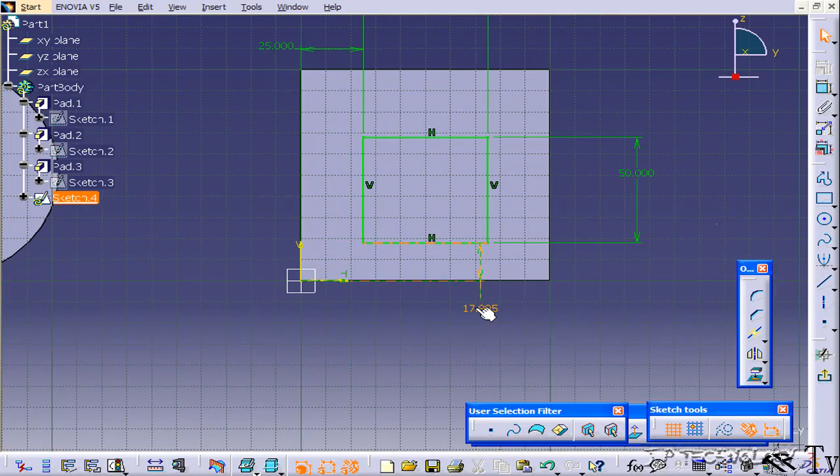So to start off, let's do one on this face here. Let's click this face, click Sketch, and let's sketch a square on the face here. And let's dimension it to 50 by 50. And then let's dimension it from the origin here. So let's make it 25 by 25. Now we've got our sketch right in the center of the solid body. So let's exit this workbench and let's apply the drafted fillet pad.

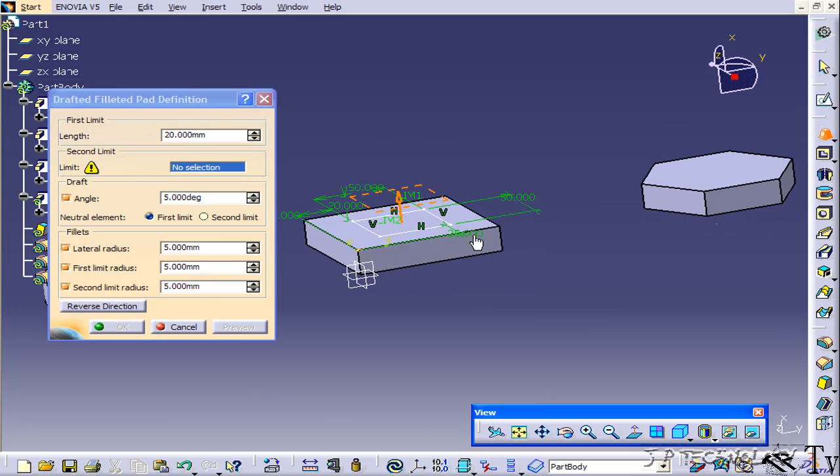So click on the sketch and let's click the drafted fillet pad, and we get the drafted fillet pad definition window here. So what we're going to have to do is go through it and select the parameters. With this type of pad though, you're limited to only doing a dimension. So for the length, you're not able to do an up to or up to surface with it.

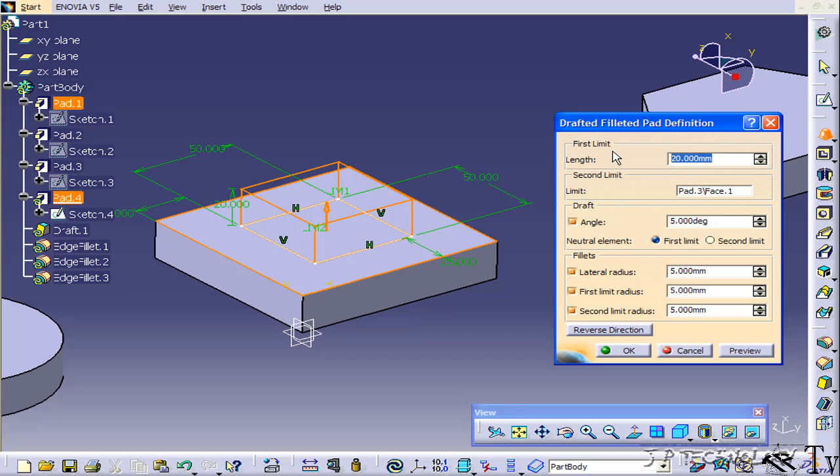Now for the second limit, click the face that you're extruding it off of. So click this face here, and you're able to toggle on and off if you want a draft angle or if you want the fillets. So for now, turn everything on, and everything's set at 5 degrees and 5 mil. Leave that, and let's put this up to 50. Now let's click OK and see what we get. And we get our extrude with the draft and the fillets.

Now if you notice, with the draft angle of 5 degrees from the top point here, it drafts it out, and when it creates this feature, you're going to get a pad, a draft, and all of the edge fillets. So from there you're able to change the pad, the draft, or the edge fillets just by clicking on them. So let's change the draft angle. Let's double click on it, and let's change it from 5 degrees to 10. Click OK, and now you can see that it's kicked it out much more.

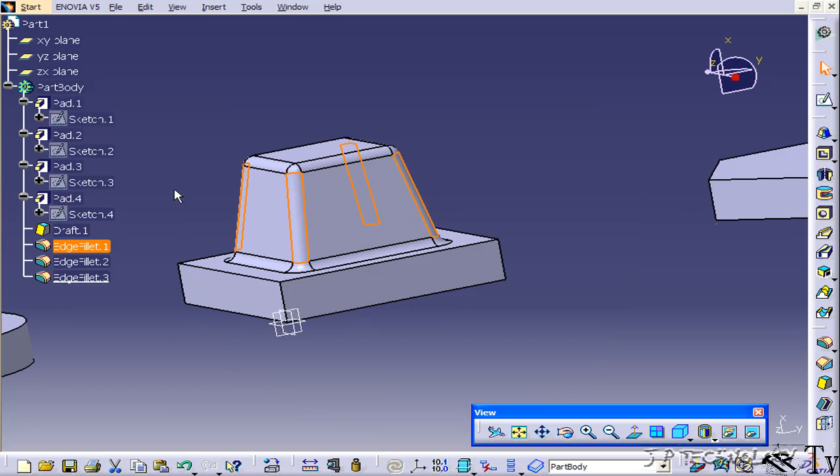Now let's delete one of these fillets, and you can see that it takes it off on all those edges. So you're able to go in and modify the pad, the draft, and the fillets after it's been made. So instead of getting back into this one menu for the drafted fillet pad, each of them creates its own feature under the part body.

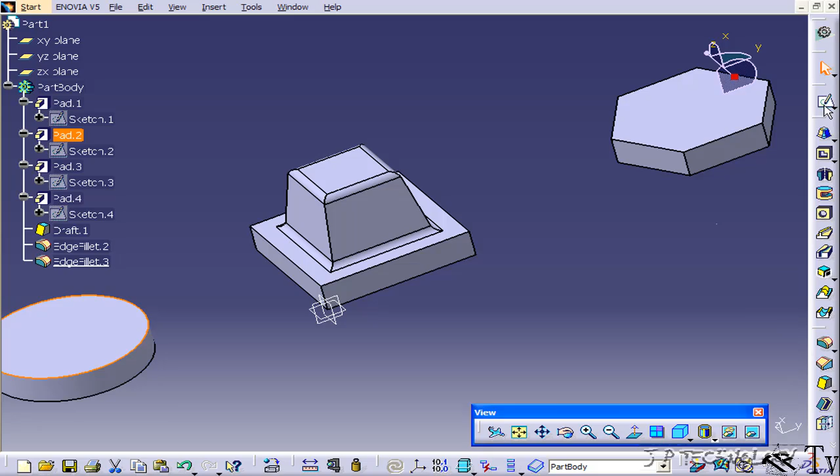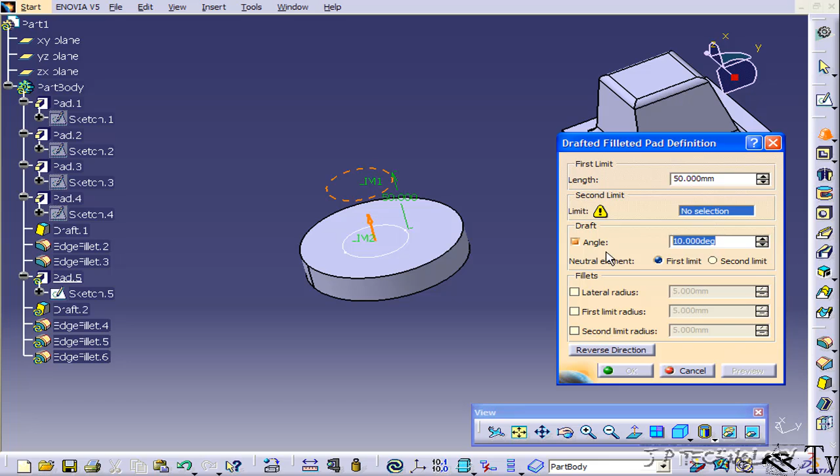So now let's do one on the circle here. Let's click this face, click Sketch, and let's just sketch a circle close to the middle. Don't worry about the dimensions. And we'll go out, click on the feature, and this time let's only make a draft. So we'll take off all the fillets, and we'll make the angle here 5. Now for the limit, we're going to choose this face here, click OK, and now we've drafted this out just 5 degrees with no fillets.

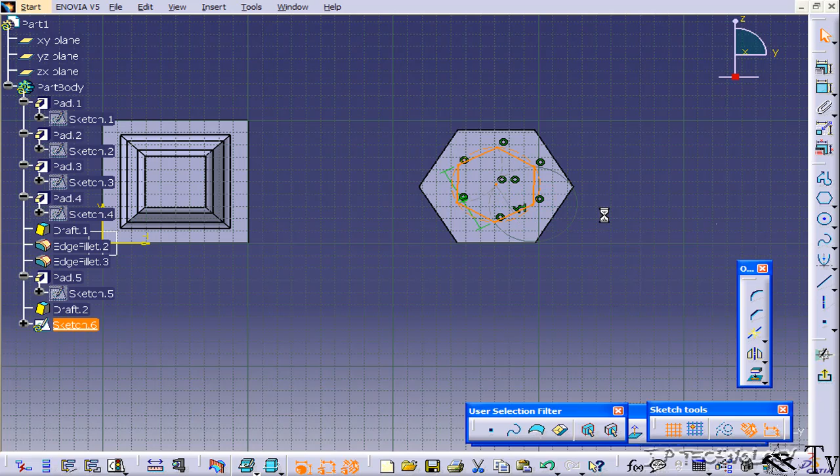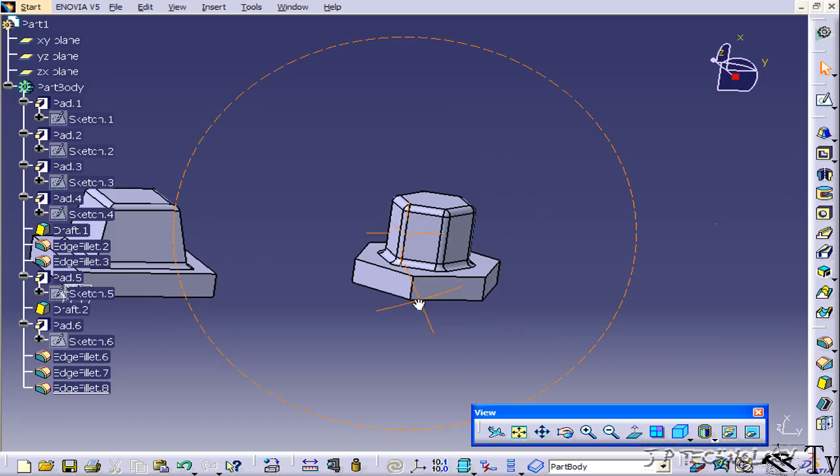Now let's do one last one on this face here. So let's click it, click Sketch, and let's use the hexagon. So click and pull it out. Now let's go back out and let's use the feature. This time let's unclick the draft angle and let's click this face here. So what we're going to have this time is just fillets and no draft angle. So let's click OK. And that's exactly what we get. No draft on it, just the fillets.

So this tool allows you to incorporate the drafts, the fillets, and the pad all in one step. So like I said, it's a time saver, as rather than going through 3 separate steps, all you have to do is one step and you get your 3 features from the one sketch. And that concludes our tutorial on how to use the drafted fillet pad within Catia V5.